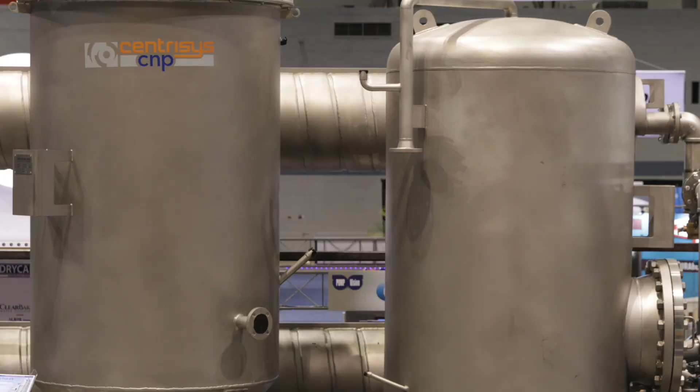Along with that, we've started to bring in other companies, mostly European companies that don't really have a footprint in the United States, but we feel they're very strong. We have Pondus, which is a thermochemical hydrolysis process. We have Hydrograv, and then we have Lipp, which is a tank and digester company.

So along those lines, I am going to have Michael start to talk about some of our important installations and what's happening with our centrifuges.

Good morning, I'm Michael Kopper, and I'm supposed to start talking about centrifuges. When I came to the United States, the centrifuge industry was very small. Even today, Centrisys is the only manufacturer to manufacture centrifuges for the environmental market in the United States. We then learned very quickly we compete against a lot of other companies coming from Europe, and we as a small company had to compete.

How can we compete against the big competitors? The biggest advantage we have, we were small, we were flexible, and we learned things and we put it right into the operation. If you look at our big installations we have right now, taking New York. New York is the biggest centrifuge installation in the United States right now, and little Centrisys won the order by

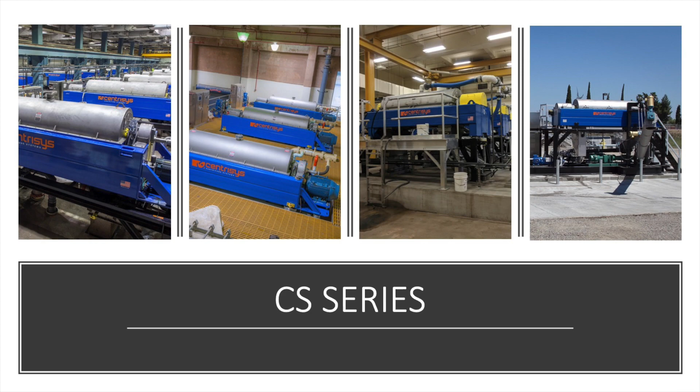being power savers, being the better company overall. We were not the cheapest in CapEx, but we were the cheapest in overall cost. So if you look at the power consumption by installing the centrifuge in New York, we reduced the power by 50% for the same flow rate, which was an advantage overall. Even so, power is still inexpensive, will get more expensive in the future, but it is a big savings. Also, it decreased the carbon footprint for New York, which for every big city right now is an incentive of reducing carbon footprint. By reducing the power consumption, New York was able to reduce the carbon footprint.

The same thing happened with the lower polymer as well as lower power costs. We have jobs in Denver and all other cities as well.

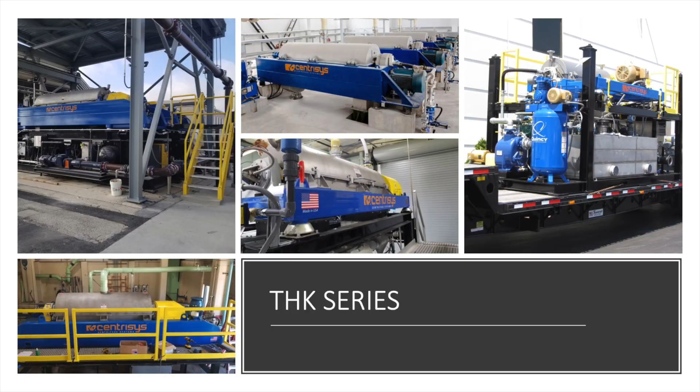Based on that, we looked at the thickening market. The thickening market, historically, we had centrifuges there, but then it went over to belt presses, rotary drum presses, but by doing so, the amount of polymer has increased tremendously. So we looked at what can we do to develop a machine where we reduce polymer, reduce power, and increase reliability.

So then we developed the THK machine, which is actually specifically designed for thickening. It is not a machine where we took a dewatering machine and modified it into a thickening machine. We made it a strict thickening machine, and the intention was to operate without polymer. Again, it is overall reducing carbon footprint for all the cities.

So now we have installed the thickening machine in several installations. Our first installation was Kenosha, where we are home. We have a very good relationship there. They helped us out, we could test there, we could do everything. It's our test ground, our playground. And we have now installed machines everywhere in the US, in China, everywhere, the THK.

Why did we develop the THK? It's for cost savings for the client. It's basically a machine which runs without polymer, or with a small amount of polymer, and we can double the flow rate. What does that mean? It means a city doesn't have to buy a second machine for standby. The standby could be just a small amount of polymer, about 1 to 2 pounds per dry ton, which is not a big expense for doubling the flow rate of the centrifuge. So that's what we have done.

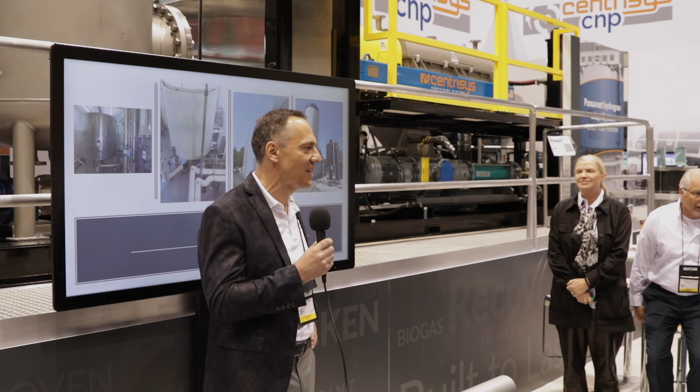Thank you, Michael. So thank you all for coming. Good morning. So we talked about the focus. Michael talked already about energy savings and how our focus is on really creating a more sustainable treatment plant. In 2014, we had an opportunity to bring a technology over from Europe called AirPrex, which is a phosphorus recovery technology.

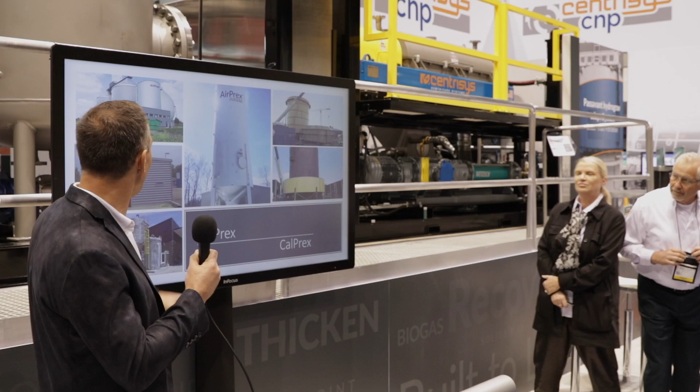We thought it was a perfect fit because it really fits into biosolids. It recovers struvite phosphorus before dewatering, to optimize dewatering performance. And so we were fortunate to put that in. So, and CNP, what does CNP stand for? Our focus is carbon, nitrogen, and phosphorus. It closes the loop.

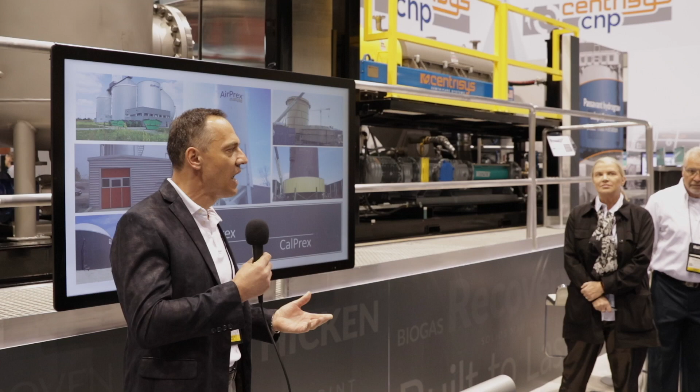We really want to create energy neutrality for treatment plants. We have done a project in Kenosha, Wisconsin, where the Kenosha treatment plant is energy neutral on the biosolids train. So we thicken with the innovative thickener from Centrisys. We hydrolyze the sludge, break the cells, create more biogas. We go through a cogeneration process, provide thermal heat to hydrolyze and dry the sludge in a belt dryer, and provide electricity to run our process.

So the energy from 1% dry solids going to 93% Class A product is provided by the solids coming into the plant. So we take no fossil fuel to get the solids from 1% to 93% Class A. We heat the digesters and provide energy to the plant, with excess electricity. So this is really our goal. We're already there on the biosolids side, being energy neutral. If you would go to the liquid side with deammonification, you'd really have an energy neutral wastewater treatment plant. So we're already there.

So our focus now is 3 areas. The one is carbon diversion, which is the hydrolysis process. I'll get to that in a second. But here we are on the P, on the phosphorus. We have on the phosphorus side, 2 processes.

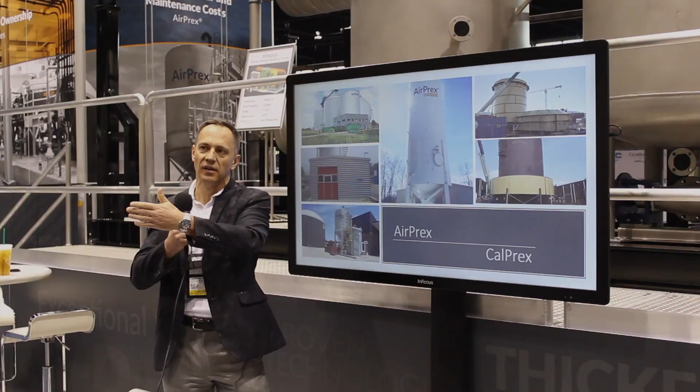One is called the AirPrex process, which is a well-established process, with next year 7 installations in the United States. The smallest one on a 10 MGD treatment plant, the largest one on a 220 MGD treatment plant in Denver Metro. What we do is create ideal conditions for magnesium ammonium phosphate, or struvite, to form after the anaerobic digester but before dewatering. So when you crystallize the phosphorus in the process and extract it, you improve dewaterability because you remove the phosphorus from your centrate stream before dewatering, and that gives you the opportunity to increase dewaterability of the cake, reduce biosolids, and provide a fertilizer in the form of struvite. So that's the post-anaerobic digestion process.

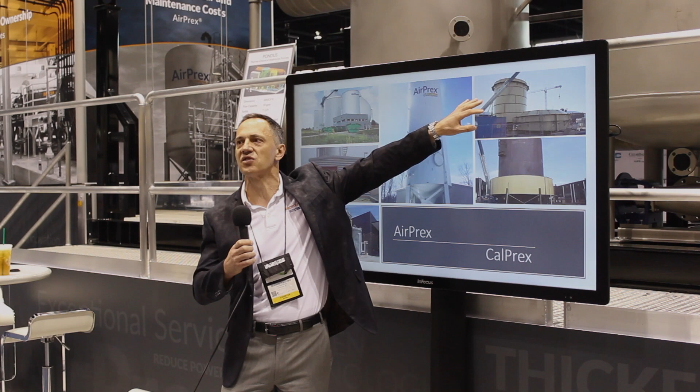Here's Denver Metro. It's in construction. It will be constructed by the end of the year, started up next year. It's the largest installation in the world. We anticipate providing about 6 to 7 tons of struvite per day.

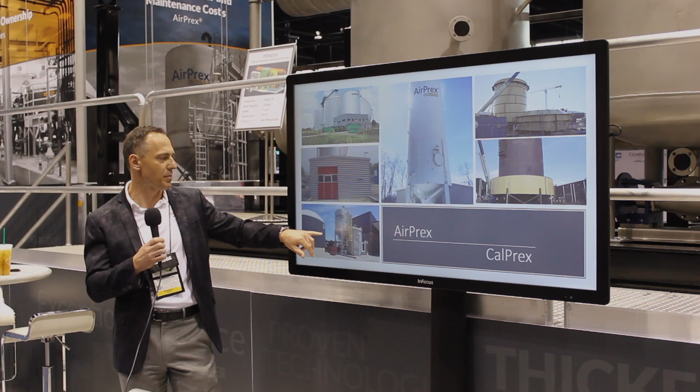And this is another installation in operation in Medina, Liverpool wastewater treatment plant. This is in combination with a CNP hydrolysis process, but we also provided the Lipp digester tanks, which is a technology we partner on in the United States. Those are modular digester, stainless steel, which can be built very quickly and are very cost effective, and were used for this project.

That's also in the CNP portfolio. But now I want to talk a little bit about CalPrex, our other phosphorus recovery technology. This is a pre-digestion technology. We recover phosphorus in the form of dicalcium phosphate, or brushite, in front of the anaerobic digester. You use a bio-release, a fermentation process, to solubilize the phosphorus, and then you extract it, crystallize it, and recover it from the process.

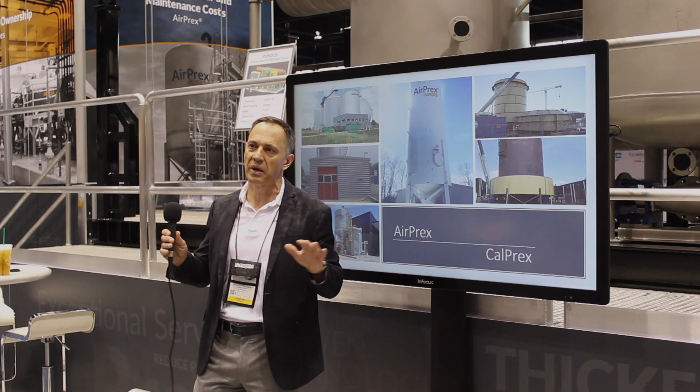The advantage is you have extremely high total phosphorus recovery rate, the highest in the industry commercially available. We can achieve up to 50% total phosphorus, between 40 and 50% recovery rate, diverting the phosphorus before it goes to the anaerobic digester, and creating a fertilizer product which has about 18% phosphorus in it versus 12% in struvite. So it's economically more valuable than a struvite product, and we don't need anaerobic digestion for the process because we don't need ammonia to form the phosphorus compound. So it can be used in aerobic plants and other technologies where there's no anaerobic digestion.

Also, the really great news we have, this came out of the University of Wisconsin in Madison with a group. The company was developed out of the soil science department, so our focus was always what we do with the fertilizer. Recently we got approval for the product by the DNR in Wisconsin, that the product is accepted for land application. So now we have a way what to do with the product, which was really important to us. Our team at CNP managed to do that, so we're quite excited about that. We can offer a solution to the customer for what we do with the product, and help you really get some money for it.

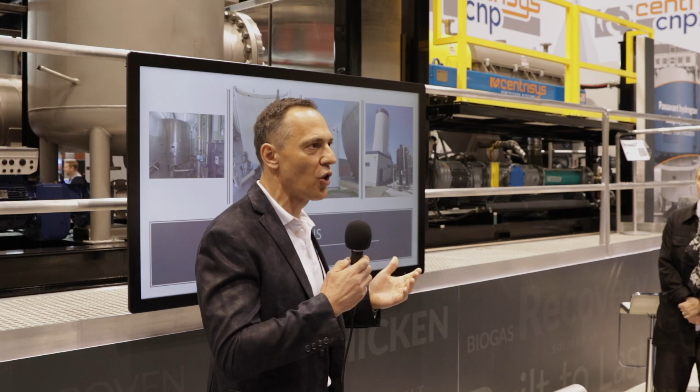Okay Michelle, can you go back? Then the other technology, one of the first ones we brought over from Europe, is a hydrolysis process. That's right behind me, PONDUS thermochemical hydrolysis.

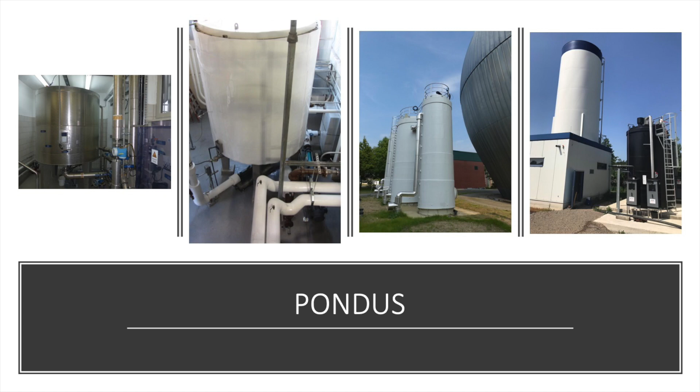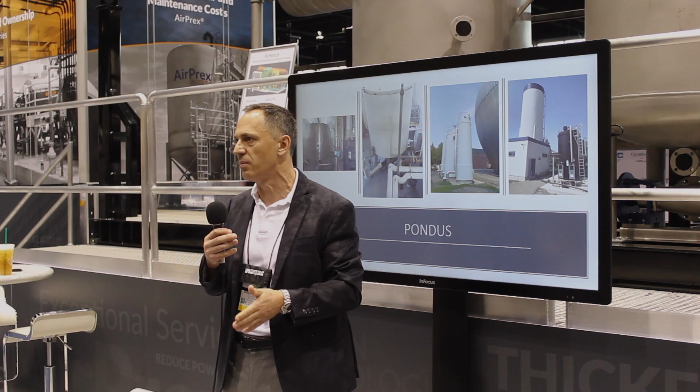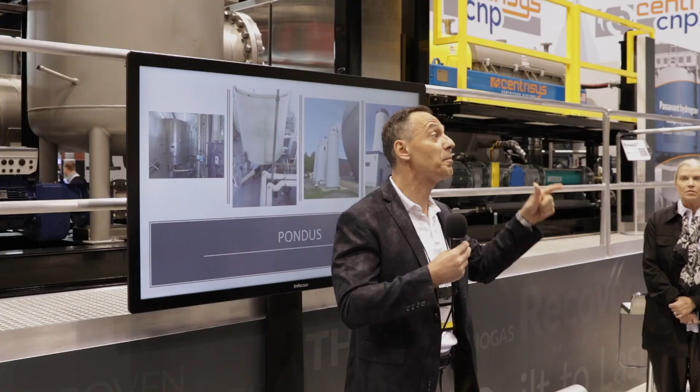Compared to other hydrolysis processes, this is a low temperature, low pressure process. We use pH change, sodium hydroxide to 11, and we heat at 150 degrees to break basically waste activated sludge cells, to make the waste activated sludge more readily digestible in the anaerobic digester. So you cut the hydrolysis process time in the anaerobic digester from like 7 days to 2 hours. What you gain by it is you can increase digester capacity, you get more biogas in your process, and since you have higher volatile solids destruction in your digester, you get better dewaterability because you have less organic content in your solids. You can save polymer and improve dewaterability.

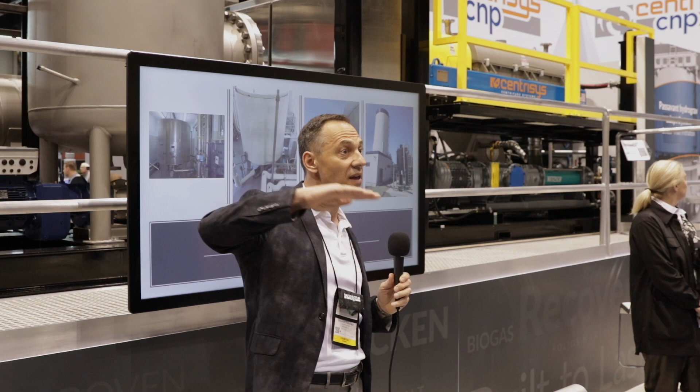We have this implemented in Kenosha, and what that allowed us is to go, with the Centrisys centrifuges and the thickening there, from about 27% solids to 31% dry cake solids, with a reduction in polymer. And that allows us, since we go to a thermal drying step afterwards, to have enough thermal energy to get to Class A. So that's really when we talk about energy savings and sustainability.

So it could be really used for small treatment plants, the smallest installation we have is about a 5 MGD plant, and the largest is going into about a 50 MGD plant. So this lends itself to small plants and large plants, a simple anaerobic conditioning system.

So here, our latest technology from hydrograv, and Dr. Armbruster is here as well. This is probably the neatest and most innovative technology in the secondary clarification arena in the last 50 years, so I was told by a leading utility director on the East Coast. What this system does is it addresses the shortcomings of secondary clarifiers, which have a fixed inlet structure designed for some flow condition, optimized for one flow condition, most likely average daily flow.

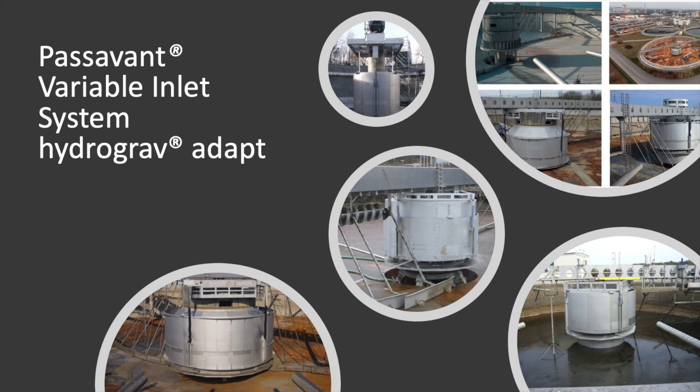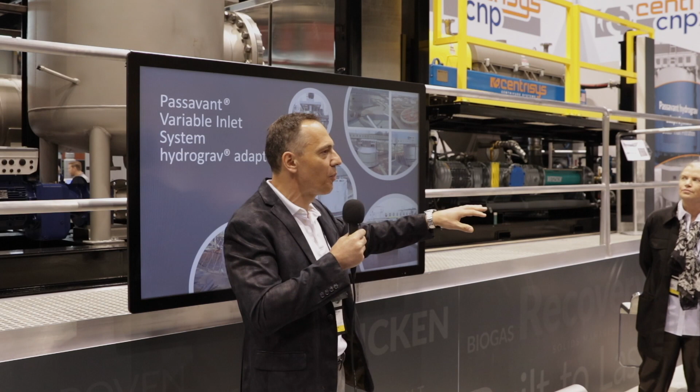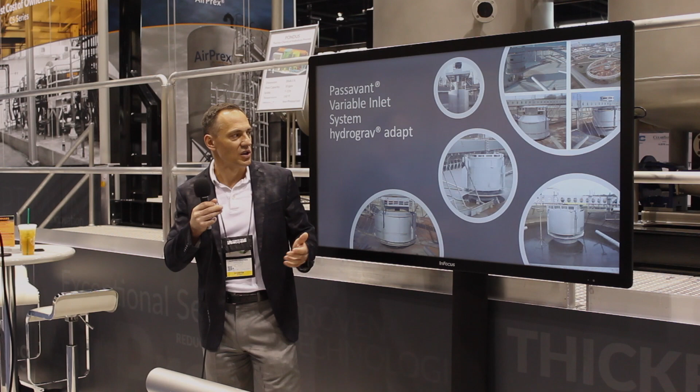But what happens when you have low flow? What happens when you have high flow? hydrograv, Martin Armbruster's group, modeled about 1,000 clarifiers or more and did CFD modeling on clarifiers to see where they work and where they don't. The problem is always the same: when the flow conditions vary, the clarifier is not optimized, and in most cases, especially at high flow, you lose suspended solids over the clarifier weir, and with that, particulate phosphorus, and capacity issues. So the idea of how this thing works is, imagine this goes over the inlet clarifier well.

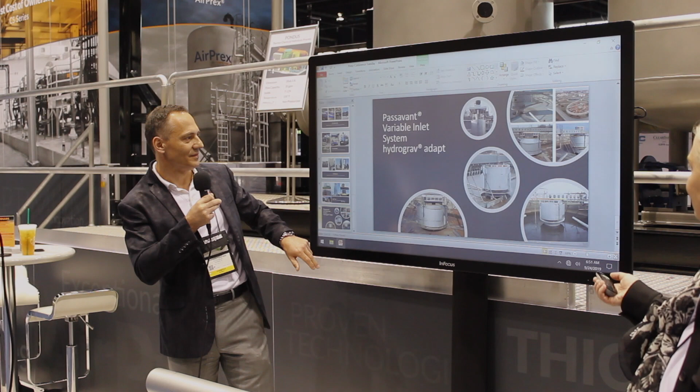So what this system does, it moves the clarifier discharge always to where the sludge blanket is. We want to use the existing settled sludge. So for example, you have a clarifier, a sludge blanket, the solids settle. Now you have a storm flow, and we discharge above the sludge blanket. Every time we discharge, we disturb it, so the solids stay in suspension, they get turbulent, and we lose those solids over the clarifier.

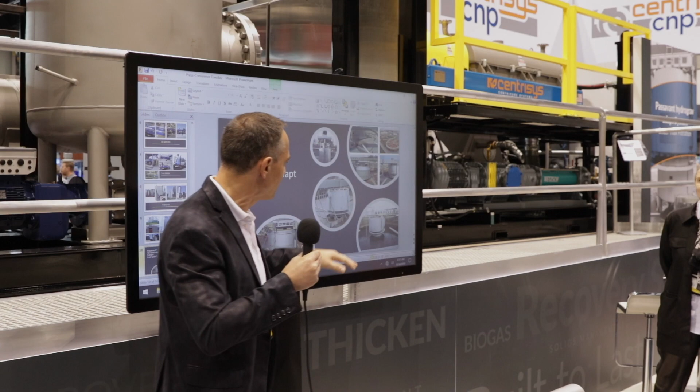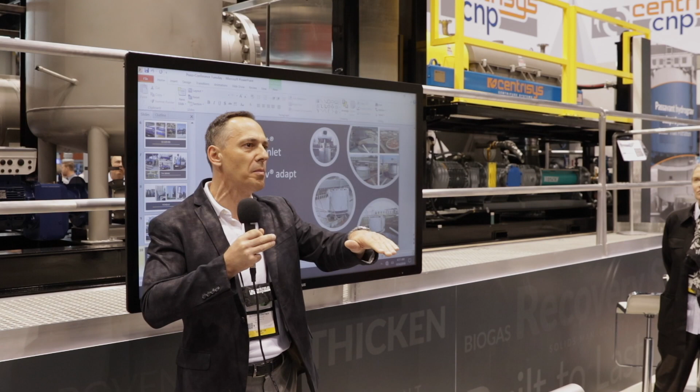What the adapt system does is use software to detect where the sludge blanket is in the clarifier position, and then we move the inlet always ideally into the sludge blanket to use minimum energy, discharging effluent into the blanket without disturbing it. So the sludge blanket stays in its position, we create additional volume in the clarifier to load it higher, and we achieve extremely low total suspended solids and phosphorus limits.

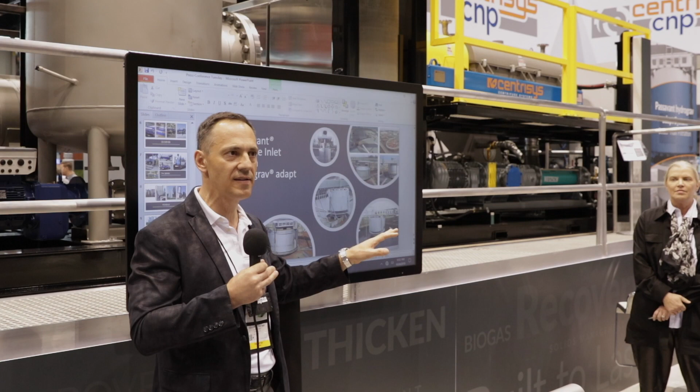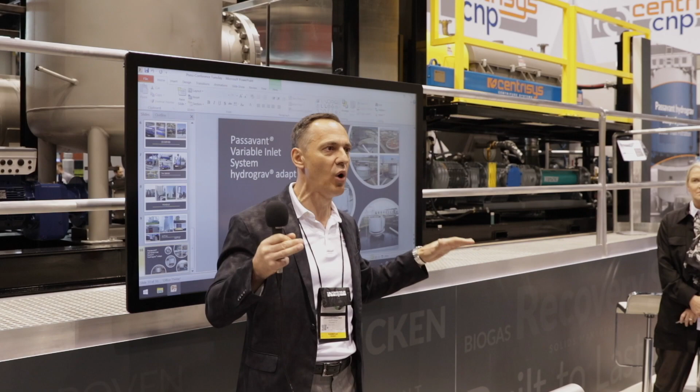So I'll give you one example: Jeddah Airport in Saudi Arabia, they had 8 clarifiers and wanted to expand the plant by 50%. They also have filters for TSS and phosphorus. The option was to build 4 new clarifiers, but there was no space. So Martin and his group modeled these 8 clarifiers and asked, can we put 50% more flow to these clarifiers? The model ran 100 simulations and said yes, we can.

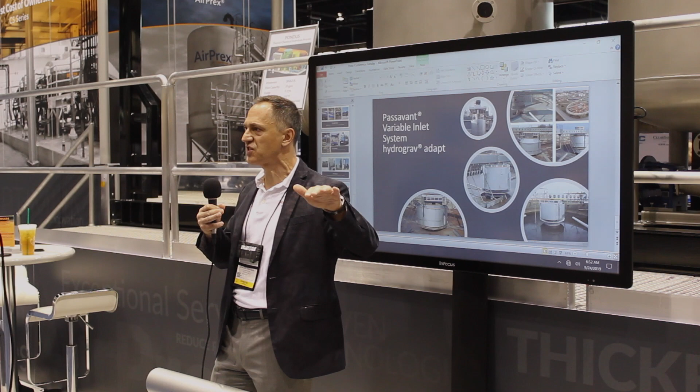Then the 8 clarifiers were retrofitted with the adapt system, and since 2016-17, the plant has been running all the flow, the 50% extra flow, to the 8 existing clarifiers. As another benefit, they were able to shut off their filtration system because the effluent limits are so low they don't need any filters anymore.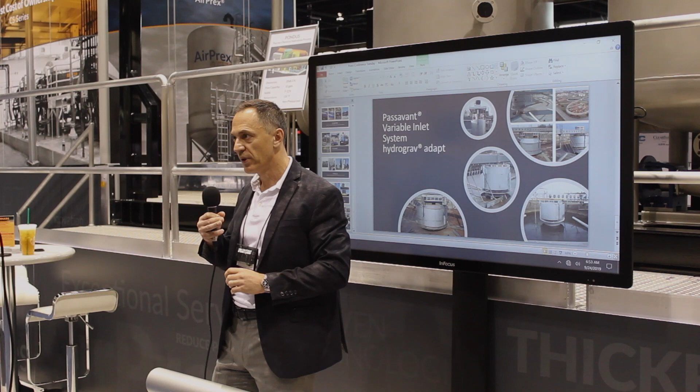Having heard that, HDI engineers did a stress test in Germany to test out the technology, and they wrote a report published last year at WEFTEC, which you guys can look up. But we approached Hampton Roads Sanitation, the Nansemond plant. Some of you may have heard they do a groundwater recharge system, the SWIFT system, in Hampton Roads, where they discharge the effluent into the aquifer, and they need really good TSS for the system.

Their option was, do we build filtration for the tune of $300-400 million for the plant to handle those solids? They came to hydrograv and asked, can you do that with your hydrograv adapt system and the model? We said yes, it looks good. Based on that, we designed a system which is going to be installed this December to see if it can maintain the TSS and phosphorus limits and the flow.

And once it pans out, all 12 or 13 plants at Hampton Roads are going to be equipped with this technology to achieve the low TSS. That will allow them to forego a tertiary filtration system on this site with huge savings - we're talking about several hundreds of millions of dollars here.

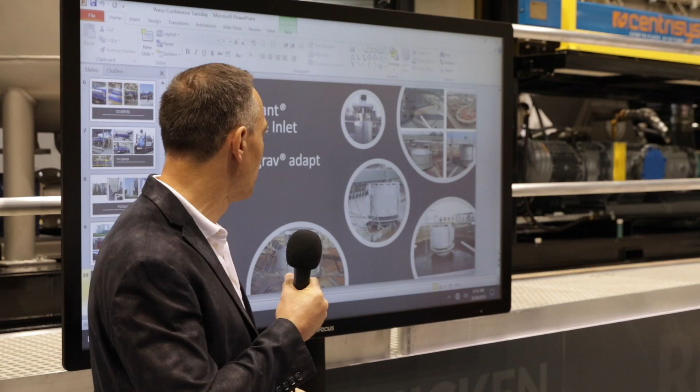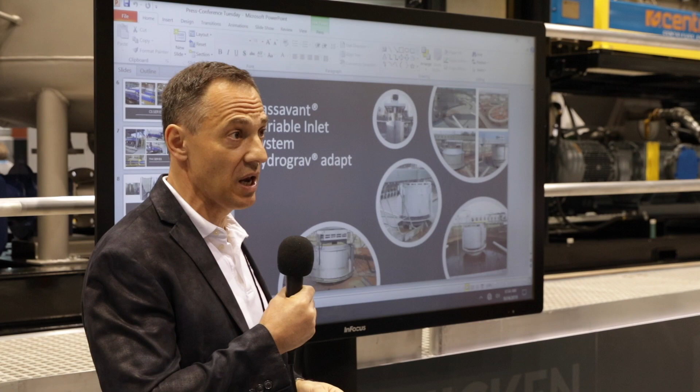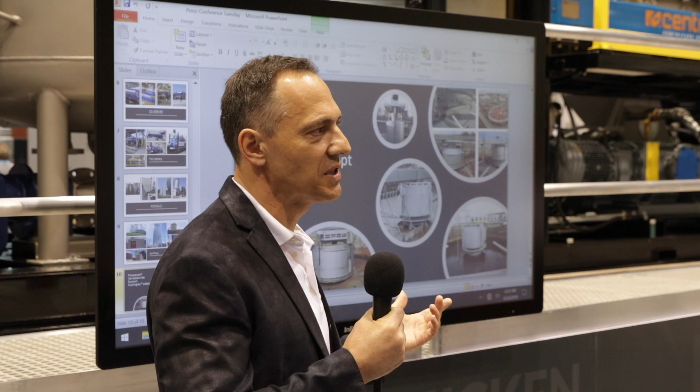The system is very simple. There's a 300-watt motor moving the structure up and down, and there are now about 100 installations in Germany of this technology. It's well proven and well accepted, and it's really a simple system that improves secondary clarification performance without chemical enhancement. We're very interested because it fits resource intensification, especially with phosphorus, allowing us to achieve very low phosphorus limits on the effluent side without using filters.

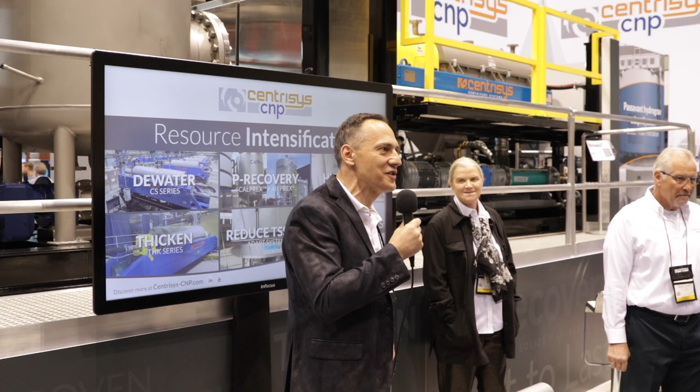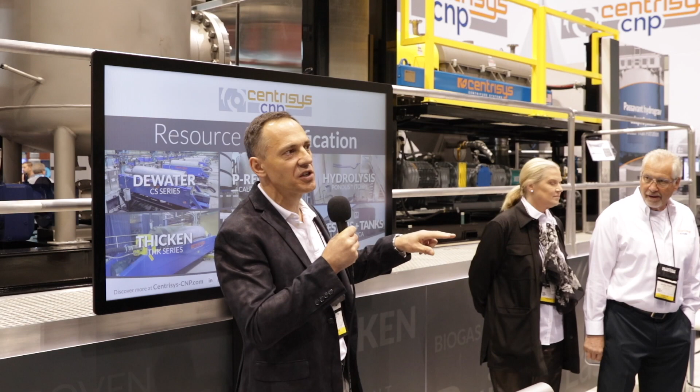So the question was, where's the nitrogen part, right? We talked about carbon on the hydrolysis, phosphorus on the CalPrex, and on the adapt and the AirPrex. So the nitrogen part comes in two places. On our hydrolysis part, we do a project in Germany where we do nitrogen recovery in combination with a hydrolysis process, that's acid with a vacuum degassing process. The second portion is we work with our partner here, the University of Wisconsin, with membranes for nitrogen recovery. We did a pilot scale at the university, it looks good, but we need to scale it up, so we should have more data next year. The focus is really cost-effective nitrogen recovery instead of destruction. Like with deammonification, we try to recover it, but as you know, it's been very cost-prohibitive to do so. We try to make it more economical to recover nitrogen, and that goes into our fertilizer component as well.